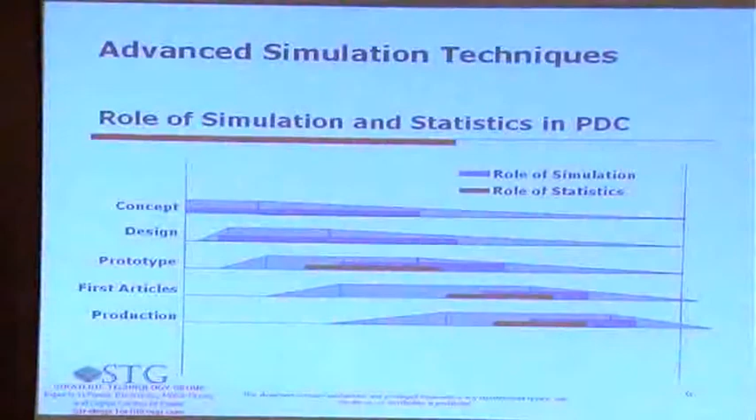Then the design stage. Now see, the hard starts and stops are for management's thinking, right? Because they need hard dates, otherwise they can't run the business. For engineers, it's a different cup of tea. The design stage may start earlier than management thinks, or earlier than what we document, because as soon as you have a concept stage, you may start schematics.

Now again, it depends on definition. Concept stage means you are validating the concept. Design stage, you begin to draw your schematics, you begin to think about component selection. So you may start design stage earlier than what you document as a start of design stage. Same thing happens in the prototype stage, the first articles, and the production. But for the sake of planning, you have some hard stops and hard starts.

And now, on top of this, we're going to impose a role of simulation. Of course, simulation has been actively pursued in the concept stage and design stage, less so in the prototype, first articles, and production stage. So what I would like to suggest to you today is think about incorporating simulation in various stages, and then we're going to also impose statistics.

Statistics means that now we are actually getting serious about getting data from the prototypes, from the first articles, from production, keeping in mind the principles of statistics. You do gather performance data for prototypes. If you're building few prototypes, let's say 10, they can be statistically significant. So think about gathering data in the prototype stage using statistical principles. And they're not very hard to follow. Okay? Any questions on this one? Okay.

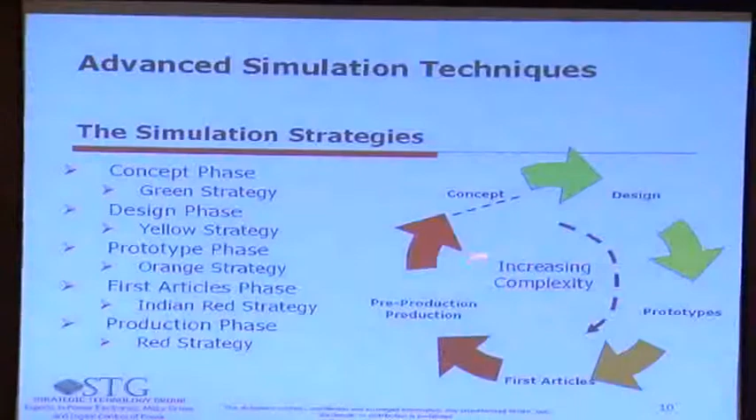Now, this is sort of a circle because the assumption is that you are accumulating body of knowledge through integration of statistics and simulation, which will feed into your next product development cycle. That's why it's a circle. Of course, you don't want to be in this circle all your life. You want to finish your product and then shoot off. But your body of knowledge continues to grow, and as a result, you continue to develop better and better products.

So in the green strategy, what are your simulation objectives? Some of the examples here: you want to verify your concept, verify ideal circuit behavior, verify performance, technical feasibility. Those are the things you want to verify in the concept phase. Choice of tools: you have quite a few available in the marketplace. MATLAB, Simulink, SPICE, MathCAD, Simplorer, Saber, and so on. Based on how deep your pocket is, you can invest a lot of money in tools.

Rules of thumb: concept clarity. And again here, I don't want to repeat, simplicity is important, ideal components are important. You're really focused on validating the concept. Design phase strategy, the yellow strategy. We have circuit behavior, performance validation, component selection. Those are some of the objectives. Again, choice of tools: SPICE, Simplorer, Saber, etc.

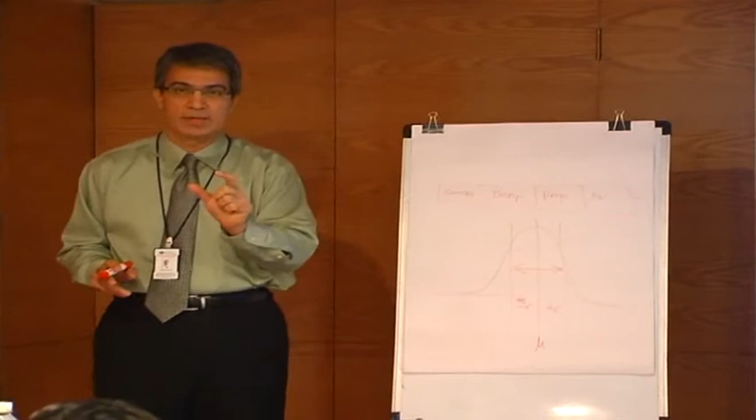So in engineering, whether you are looking at components or processes, you have to think that all the processes, all the components have a normal distribution. Now that gives you your frame of reference with which you are going to begin to evaluate your manufacturing, your prototypes, and that's how you begin to incorporate that data into simulation as well. And then I'm going to take it a step further.

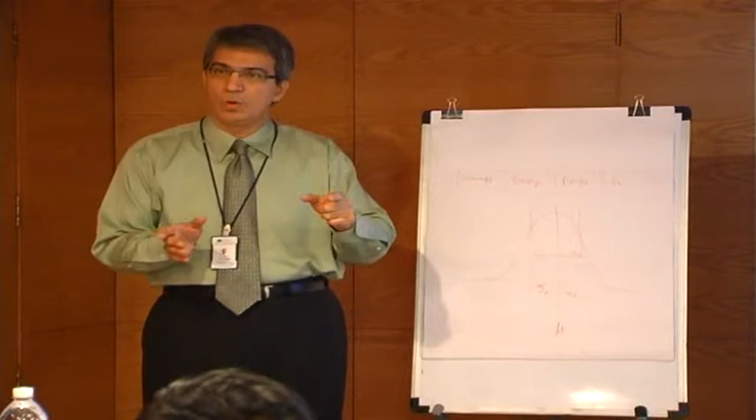Now this is really about two things. One is you want to develop a product in a very short period of time, and when you are done, it has to be a world-class product. You cannot develop a world-class product without paying careful attention to statistics. It's just not possible. And shortening the product development cycle is only possible when you have the right tools with the right knowledge. And how do you make sure you continue to develop world-class products?

Okay, so we talked about component tolerances. You think of component tolerance as a normal distribution, with minus tolerance and plus tolerance. If you're using a mechanical part, you may have lopsided tolerances, say minus 0 plus 1%. Even then, that tolerance is going to be normally distributed with left and right extremes. So you can always adjust your mu, the mean, and sigma, the standard deviation, with respect to your tolerance. The minute you incorporate statistics, things change dramatically in terms of manufacturability.

So this is plus 2 sigma, minus 2 sigma: the probability of X having a value in this range is 95%. There's a curve where you'll see different probability distributions. Here it is. So 68% of your population will lie in plus minus 1 sigma. With plus minus 2 sigma, you're almost at 95%. And with plus minus 3 sigma, you're at, I think, 99% or something like that. So this is how your tolerances are: 68% is going to be in that plus minus 1 sigma.

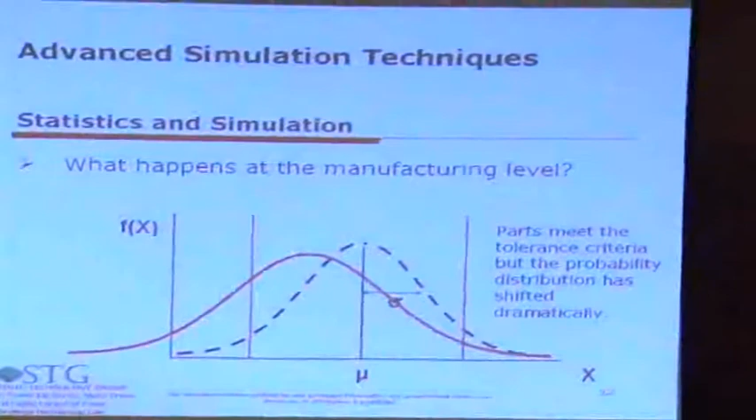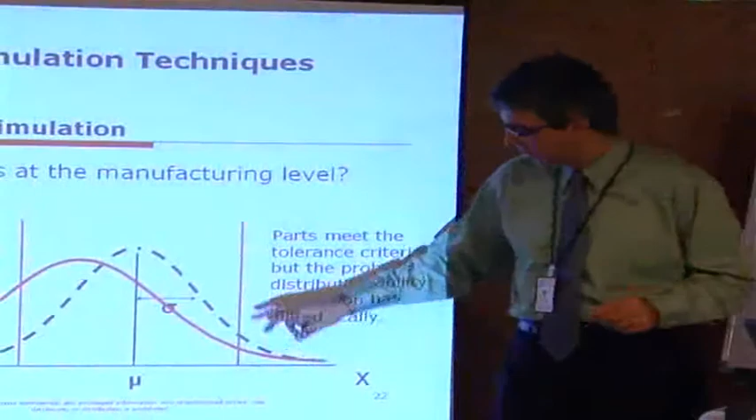Okay, now what really happens at the manufacturing level? What begins to happen? Right now, normally when you order a part from outside, you have an incoming inspection. You have one component or two components, and you will inspect mainly that it is within tolerance. You don't care about anything else, right? Take a simple example. I have a resistor, or I have an inductor, I have a transformer. My inductance value was plus minus 2%, 5%, right? So as long as your vendor is able to give you components within this range, you're happy, right?

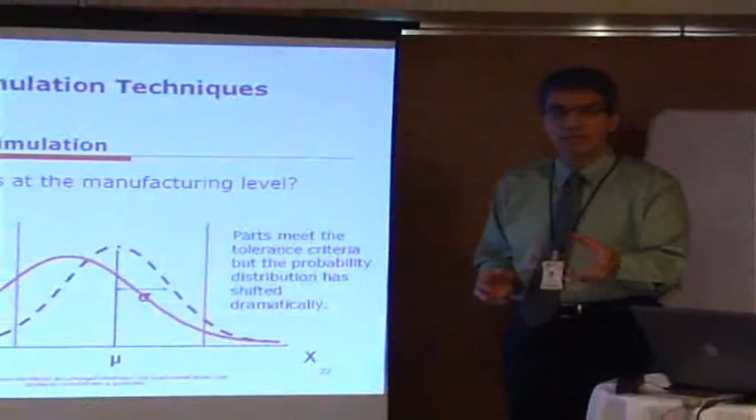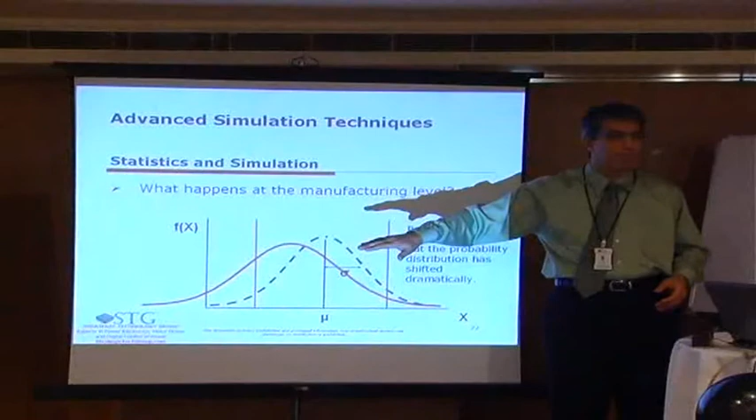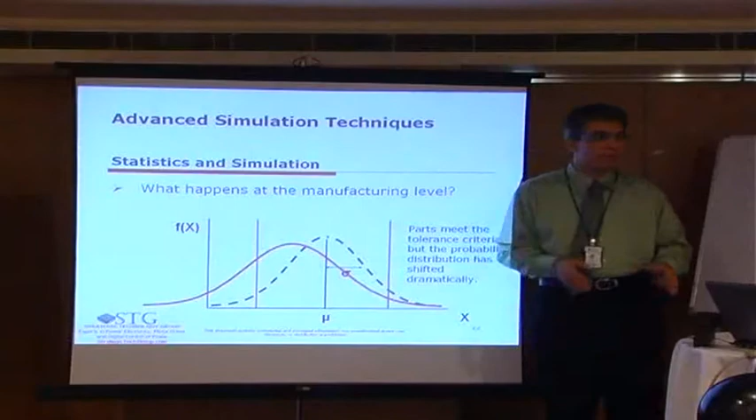You may not know the probability distribution. The vendor may have enough money in his quotation that he is reworking these components which have fallen out of tolerance. But you're happy because you're getting within plus minus. But remember, when you're doing design, the basic assumption is that everything is normally distributed. 68% of the population is in plus minus sigma, and it has implications because when you begin to simulate, simulation also assumes everything is normally distributed.

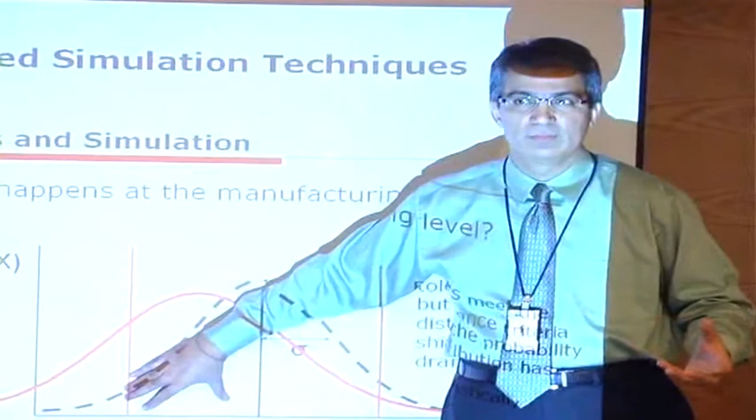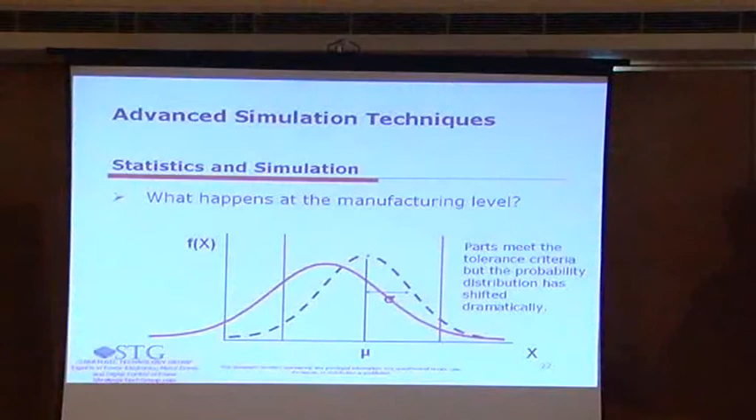Now things begin to skew, things begin to fall apart when you say, well, actually the majority of the components are lying in this range. Now what happens? Now I want you to think about the bigger picture, patterns. When you have a design, when you have a system, if everything is normally distributed, everything is random, the output is also normally distributed. But when things are not normally distributed inside a system, then the output is not. So that's something you want to think about.

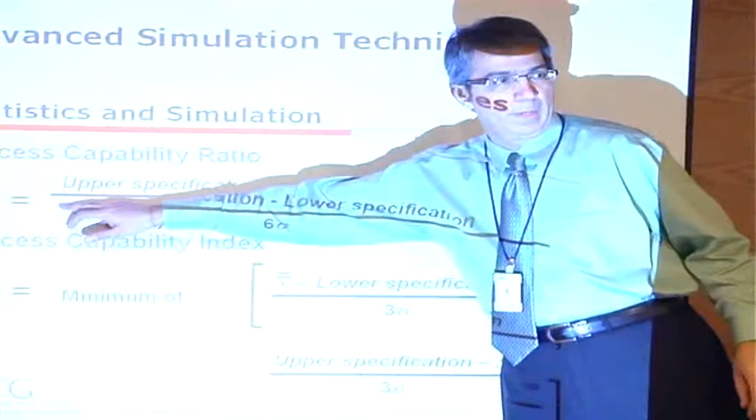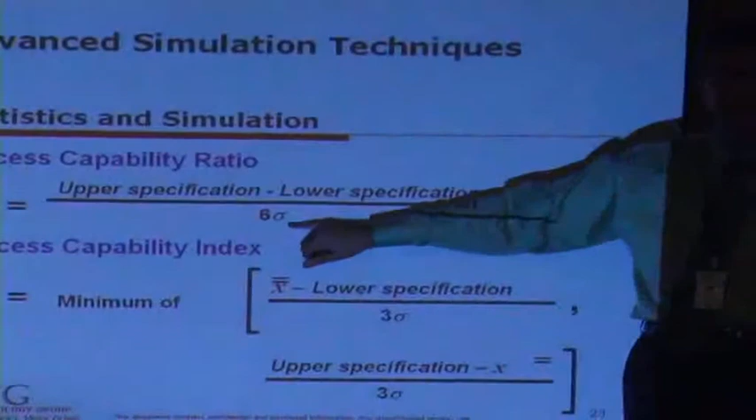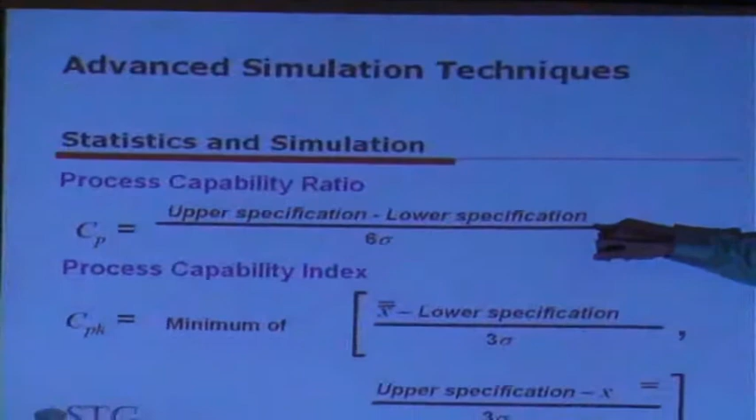There are two good numbers, and it's simple to incorporate in your incoming inspection: be able to calculate the number CP and the number CPK. And I encourage our clients to calculate these numbers anytime you have a batch of parts coming in. CP is upper specification minus lower specification divided by 6 sigma. Now if you're normally distributed, this number is going to be 1, because we have seen the spread is plus minus 3 sigma, which is 6 sigma. So when your process is normally distributed, the upper specification is going to be 3 sigma, the lower is going to be 3 sigma, and it's going to come out to be 1.

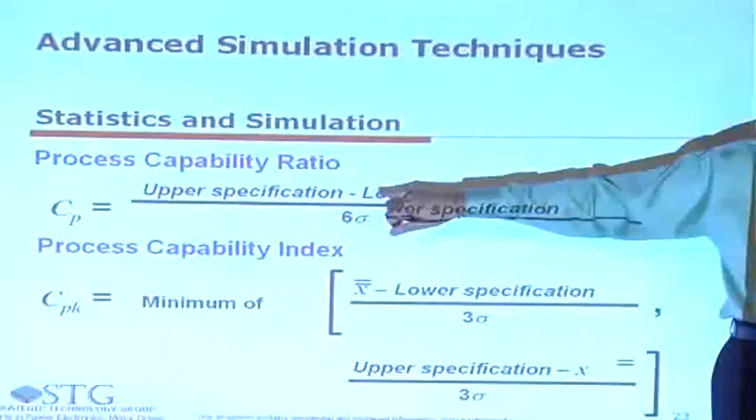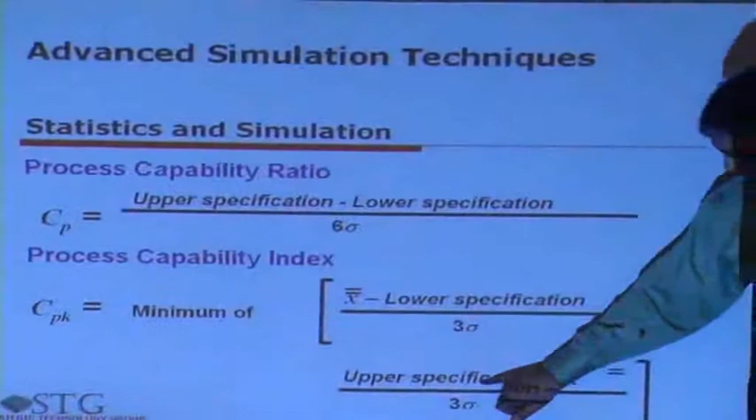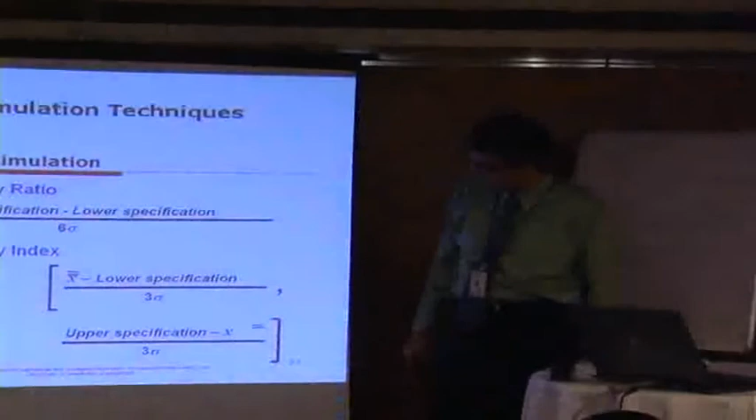Okay. The CPK value has got two values: mean minus lower specification, and upper specification minus the mean. Now these numbers will come out to be -1 and +1. So if I assume my mu to be 0, I can normalize. Okay.

In Canada, he always admires how quickly Indians adapt to new conditions, and they take everything in their stride. And he also has some Indian clients. He always gives me great examples. And he says it's amazing that when you have a certain change of circumstances, Indian people adapt to that quite quickly. And when I came here, I made a good effort to be a good Indian, that I can take everything in stride and not get rattled with glitches. So it's part of the game, I guess, in India, to take everything in stride.

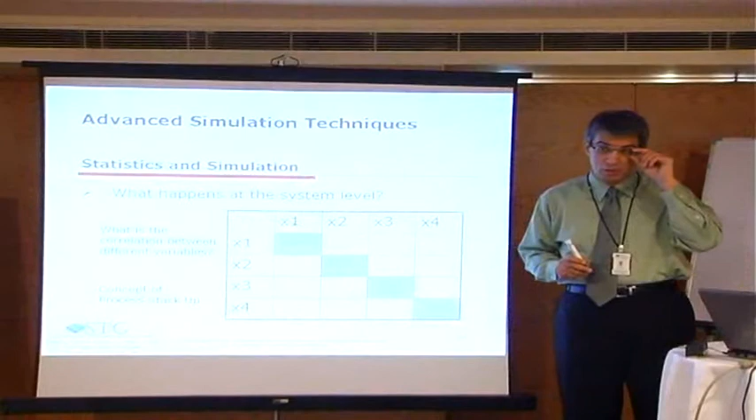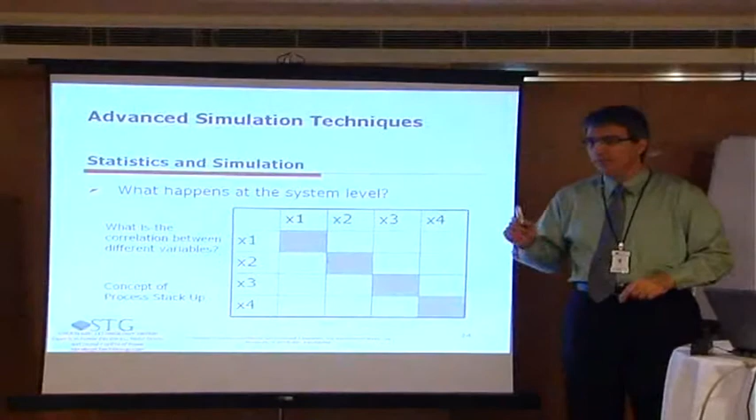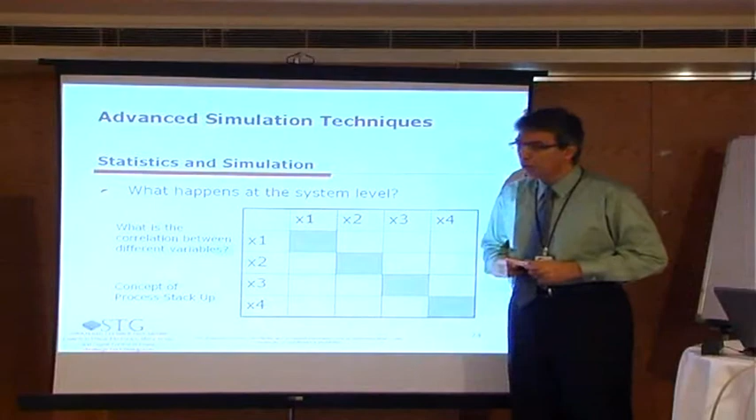All right, so we are back up. So that's one way to evaluate your normal distribution. And then this is where I want to introduce a concept which I think is important: if you have a number of variables, you can line them up vertically and horizontally. Now I want you to think about correlation between these variables. I'm not talking about the actual correlation such as defined by Newton's laws, or Joule's laws, or V = IR. These are statistical correlations. Statistical correlation means that you really don't know how they are correlated except through collection of data.

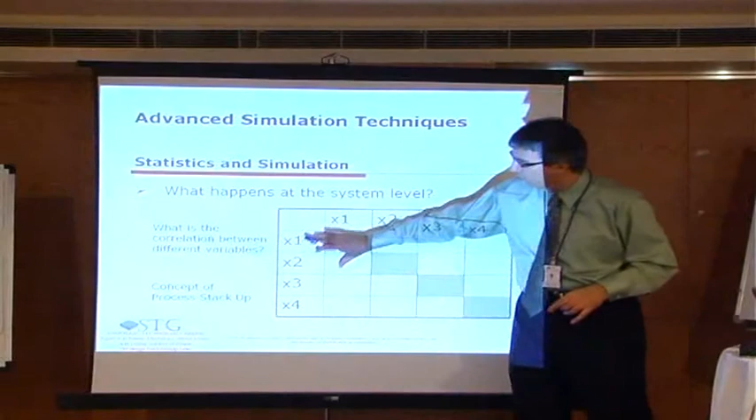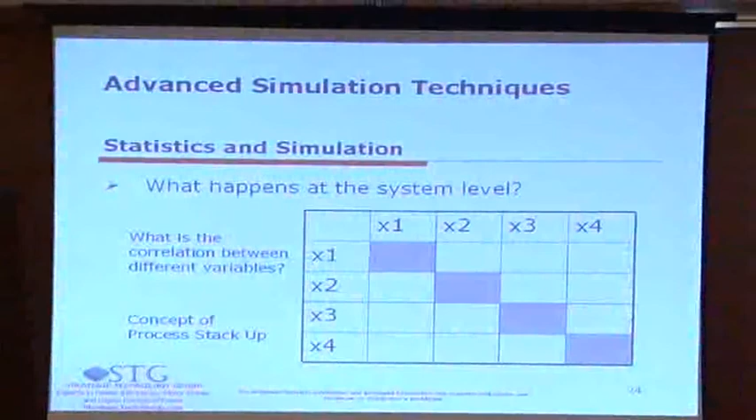And when you correlate, the concept is called process stack up. What that means, on a simple scale, is if I begin to get parts where, let's say, my normal distribution is shifted, and I don't know about it. So my mu is supposed to be here. If I take a second subsystem, my mu may be also shifted,